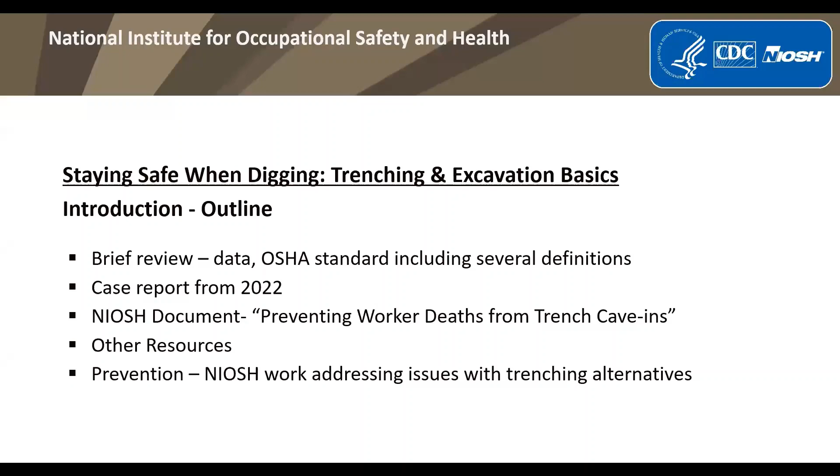Here's the basic outline I'll be following today. I'll be reviewing several different types of information related to trenching safety, emphasizing cave-in or collapse hazards, but I won't be presenting all the protective measures related to other trench safety and health issues, which might include falling loads, hazardous atmospheres, and hazards from mobile equipment. I think we might touch on some of those topics in some of our other presentations. I have placed a number of internet links in my slides that I hope will be useful to refer to, and I believe the slides, as Kevin mentioned, will be readily available for viewing later.

In a July 2022, so last year, OSHA news release, which was released in the midst of the increased numbers of fatalities in 2022, OSHA announced that in keeping with its national emphasis program for excavations, there would be enhanced enforcement initiatives and outreach programs focused on trenching. So far in 2023, as of early August, there have been 8 workers who have died in trench collapses, with those deaths recorded in the OSHA information system.

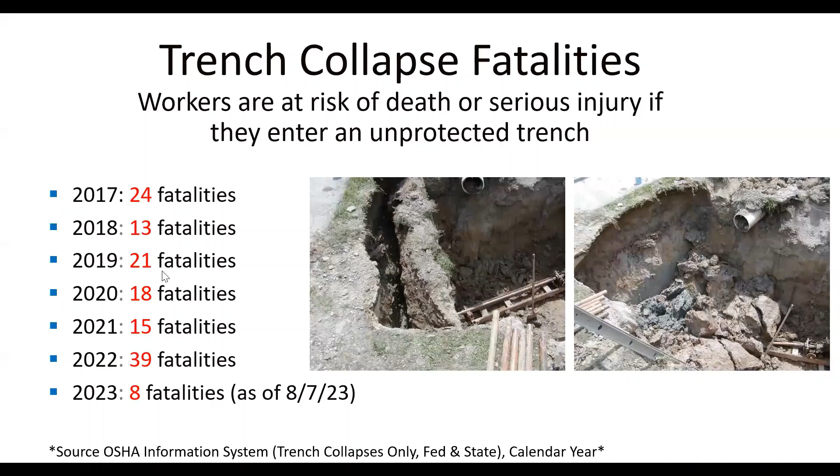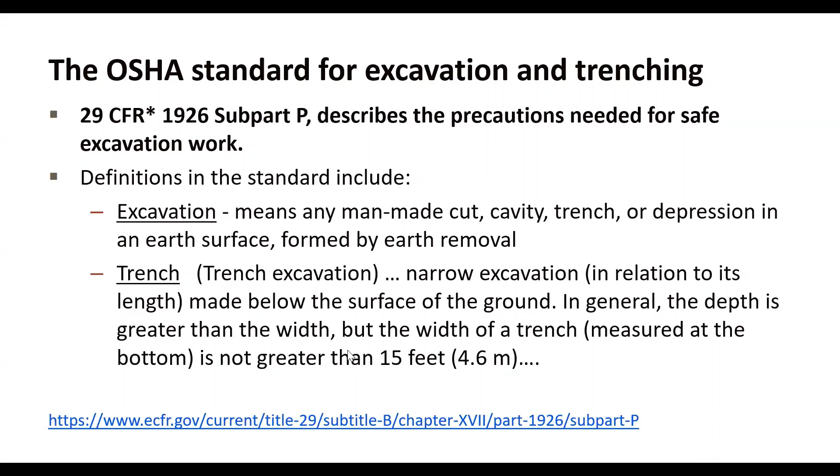The OSHA Trenching and Excavation webpage also has a link to the standard, but also has information on directives, videos, and links to useful publications.

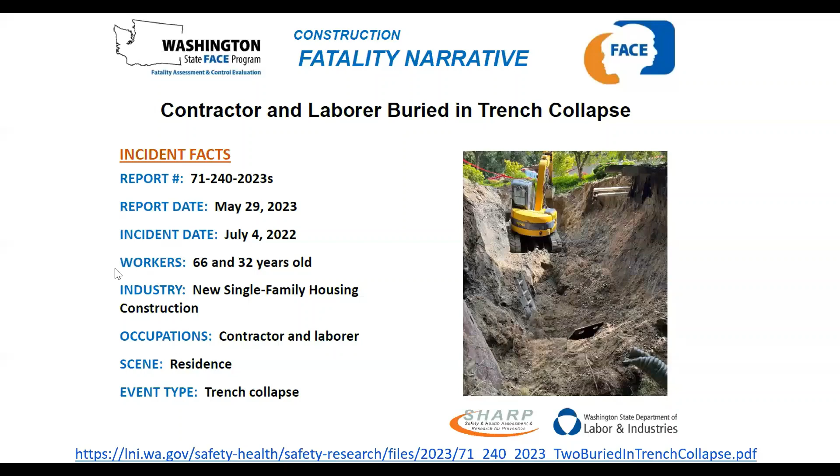Next, I'm going to go over a report of 2 workers who died in a trench collapse last year. This is information from the Washington State FACE, or Fatality Assessment and Control Evaluation Program. This incident involved new single-family housing construction.

In this incident, a 66-year-old contractor and a 32-year-old laborer died when the trench they were working in collapsed, burying them. A total of 4 workers had been working at a residence for a week to replace a sewer line, and they had dug a trench that was 26 feet long and 24 feet deep. It was 24 feet wide at the top and 8 feet wide at the bottom.

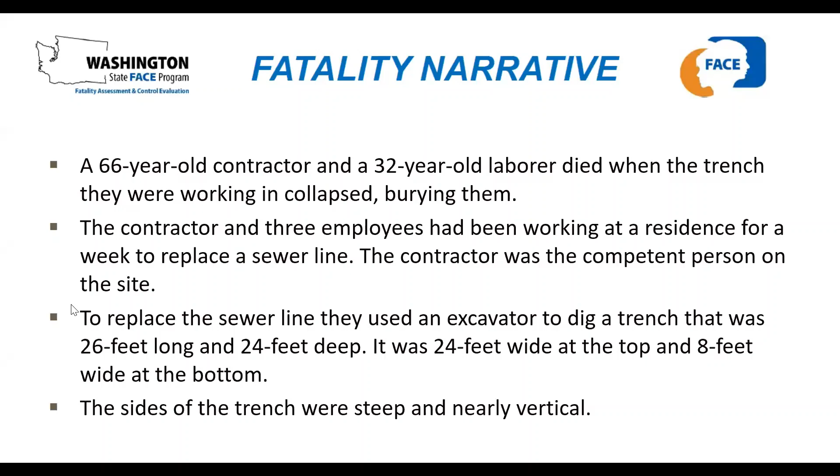The trench was dug in unstable type C soil, and protective systems or methods such as shoring, shielding, for example with trench boxes, or sloping and benching of the sides were not used. The day before the incident, a portion of the trench had collapsed after a rainstorm.

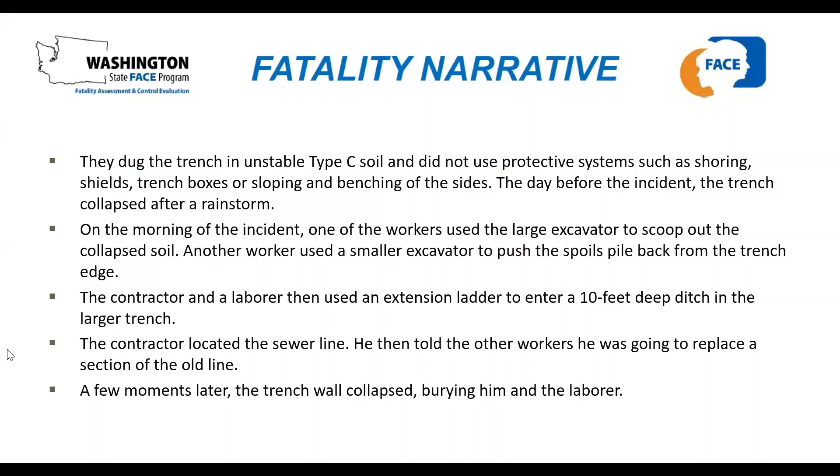On the morning of the incident, one of the workers used a large excavator to scoop out the collapsed soil, and the contractor and a laborer used an extension ladder to enter a 10-foot deep ditch that had been dug in the larger trench. A few moments later, the trench wall collapsed, burying both workers.

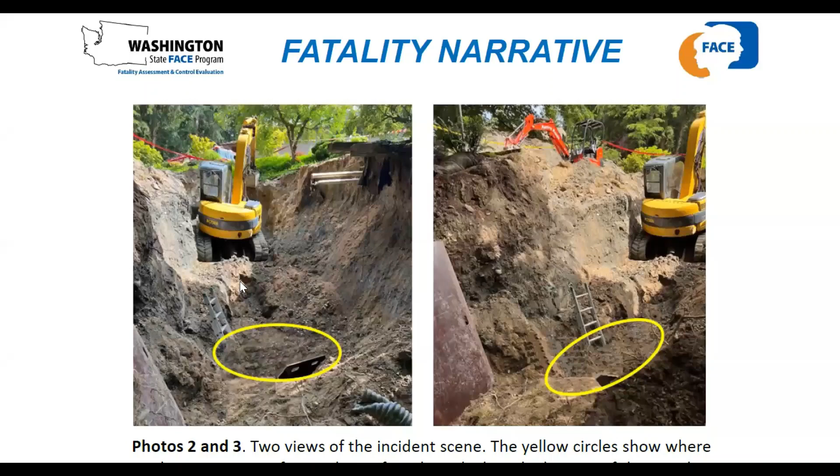This is a slide that has a couple of photos, which are a little bit hard to see, but the yellow circles show where the workers had entered the lower portion of the trench and where it had collapsed. Based on the findings, the report lists a number of requirements based on the Washington State Standard for Protection of Employees in Excavations.

The FACE program investigators also made recommendations in the report, including that all trenches should be inspected before workers enter, and that workers never enter a trench or excavation that does not have an adequate protective system in place. And workers should not assume there will be a warning sign before a cave-in, or that there will be time to escape should a collapse occur.

The National Institute for Occupational Safety and Health, or NIOSH, which is where I work, has a document called Workplace Solutions: Preventing Worker Deaths from Trench Cave-ins. The NIOSH document can be found at this link I have at the bottom of the slide.

And as I mentioned before, our document mentions that the OSHA standard describes the precautions required by OSHA for excavation work. The NIOSH recommendations presented for employers in this document emphasize that employers should conduct pre-job planning before the job begins, and I'm going to summarize some of those steps after this slide. And also the NIOSH document has recommendations for employers to use safe operations during the job.

The next 2 slides include recommendations for employers to perform pre-job planning. Employers should train and designate a competent person to ensure safety measures are in place, with a competent person being one who understands OSHA regulations, can recognize hazards, and is authorized to correct them. Employers should use processes to determine the exact location and depth of utilities before digging. 811 is the national call before you dig phone number that can be useful for this procedure.

Employers should have a competent person evaluate the soil to determine its stability. There are resources to help with this, including an appendix to the OSHA standard, which provides techniques for evaluating the condition of the soil. And employers should plan the job layout to identify safe locations away from the trench for spoil piles and heavy equipment routes.

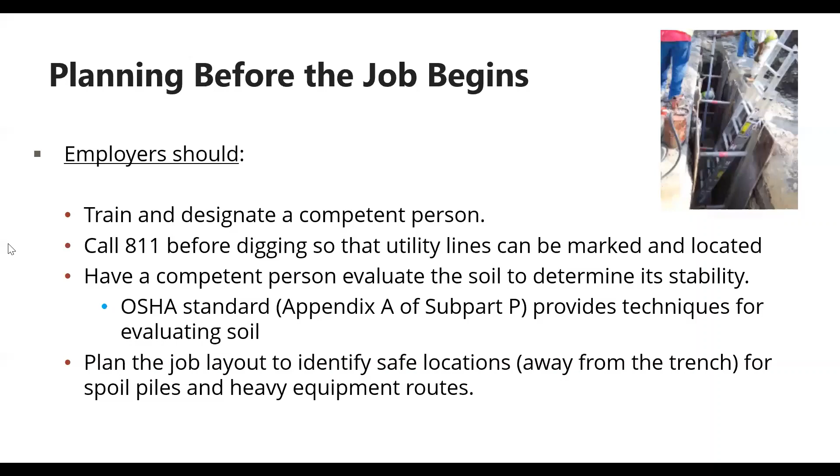Employers should also have a competent person determine what type of protective system will be used for the job and schedule the steps needed to have the system complete and in place before workers enter. OSHA requires that all excavations 5 feet deep or greater make use of protective system options, which can include sloping or benching the ground, shoring the trench with supports, or shielding the trench, for example, using a trench box. And I think we're going to see some examples of those later in this webinar.

OSHA also requires employers to provide ladders, steps, ramps, or other safe means of egress for workers working in trench excavations 4 feet deep or deeper. The NIOSH document notes that trenches greater than 20 feet deep can be more complex and require that the competent person adhere to the OSHA standard with options that can include choosing a manufactured protective system with the appropriate depth rating, or use of a registered professional engineer to design a site-specific protective system.

Employers should train workers involved in these jobs about hazards and work practices, with the training in a language that they understand and at the appropriate literacy level. And lastly, on this slide, employers should develop a trench emergency action plan to describe steps to be taken and to provide contact information in case of an emergency.

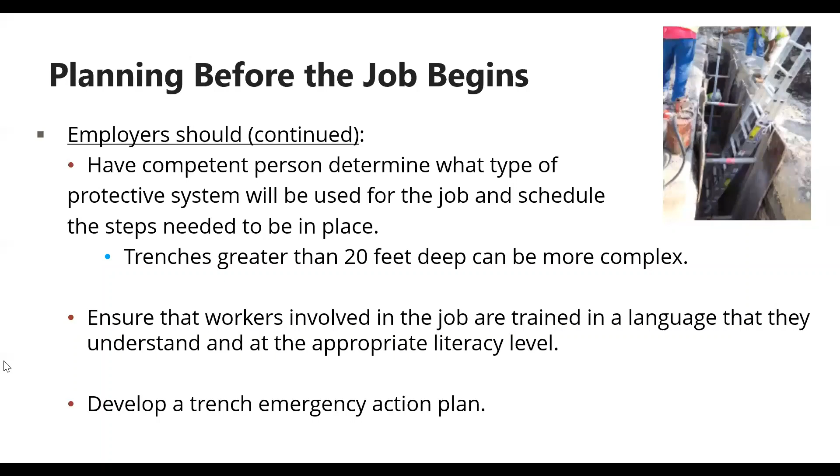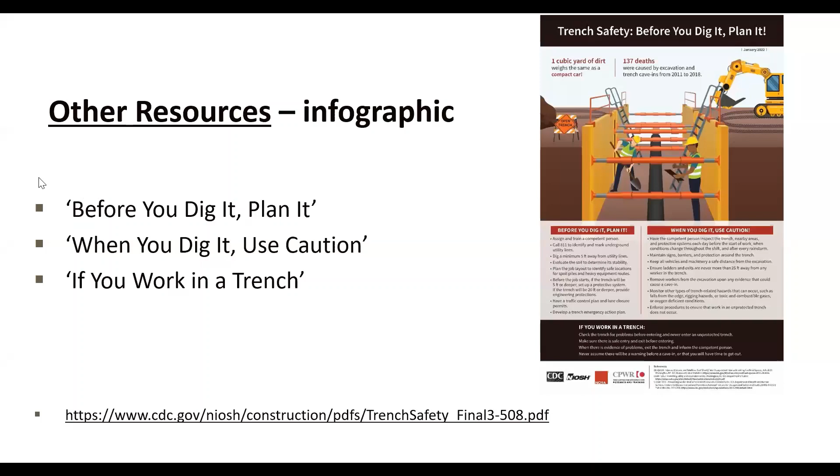There are lots of other resources on trench excavation safety, which are good for everyone to know about because different resources may be helpful for different purposes. For example, NIOSH and CPWR also have web pages on this topic, and I've listed the links on this slide. A one-page infographic is shown on this slide, and the infographic is organized around the categories of before you dig it, plan it, when you dig it, use caution, and at the bottom, there's a short section for workers titled, If You Work in a Trench.

There are short videos available, including one from just last month from the Laborers Health and Safety Fund of North America, and that video is called An Overview of Basic Trench Safety. NIOSH published a science blog in 2019, which reviewed trenching safety and construction. But the science blog also focused on current issues related to alternatives to trenching.

Consistent with the hierarchy of controls, one way to prevent trench collapse and in turn trenching fatalities is to use alternative methods where feasible. Among the alternatives to digging a trench are directional boring, pipe ramming, utility tunneling and pipe jacking, or relining the existing pipe, including the technique known as cured-in-place pipe. Cured-in-place pipe techniques may be used in some situations to perform needed maintenance or repair of underground pipes. This link at the bottom of the slide is the link for a different NIOSH science blog from a couple of years ago that explains some of the basics of cured-in-place pipe techniques.

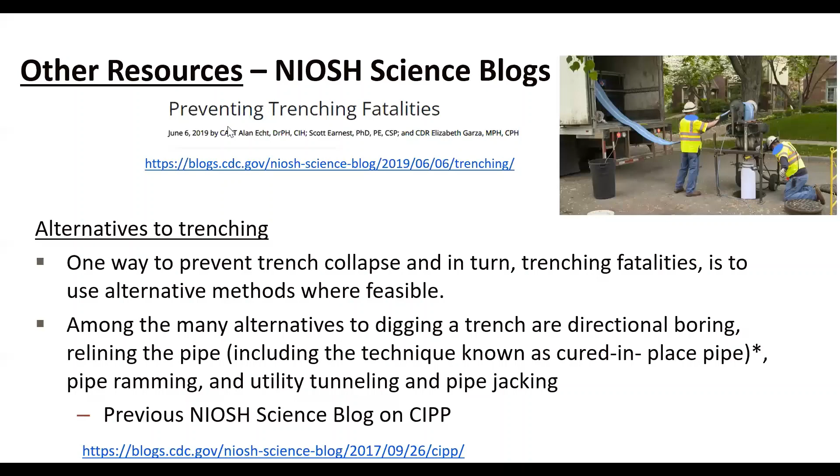And lastly, for my introduction to the rest of today's webinar, a trench safety stand down was first held in 2016, organized by the National Utility Contractors Association, with OSHA joining as a partner a year later. As you know, a safety stand down is an opportunity for employers to talk directly to employees and others about safety. June 2024, so next June, will be the 5th annual Trench Safety Month. And we encourage you to keep your eyes open for the mid-June 2024 dates for next year's Trench Safety Stand Down.

Okay. So good afternoon, everybody. My name is Phillippe Falkner. I'm a safety director for Ed Bell Construction here in Dallas, Texas. And just to give a touch of background so you can see the perspective on the comments I'm going to make, before my journey in safety management, I spent a long time as an operations manager. So I've seen both sides of this equation, not only building it, but making sure everybody's building it safely and everybody goes home at the end of the day.

So I try to make my presentations and my training a little less about process and procedure, and a lot more about culture and adoption. So the comments I have today are about what I have found to be some best practices that we use here in North Texas to really ensure that the processes and programs we set up, our people have the ability to be successful with them.

So one of the first things that I know Doug mentioned was also appropriate processes for soil classification. I think a good process is part of your planning, really determining soil classification, what type of system is necessary before you start digging, before you get the crew in there. You kind of put your people's back against the wall if they've already started putting a bucket in the ground, and then they're trying to figure this out, and they either don't have the right protection system, or they've got to move from benching to a protection system, or whatever it may be. Having this done well in advance is part of the critical planning process.

Making sure you've got support to your team to help determine the correct protective measures. You can have a competent person on site, but having additional resources, even for a competent person, sometimes two heads are better than one. If you've got multiple people trained for competent person training, make sure they're discussing with each other. It's always better to get kind of a group consensus than if one person's just unsure about what they've got on their hands. And that not only goes for soil classification, but what type of shoring is appropriate.

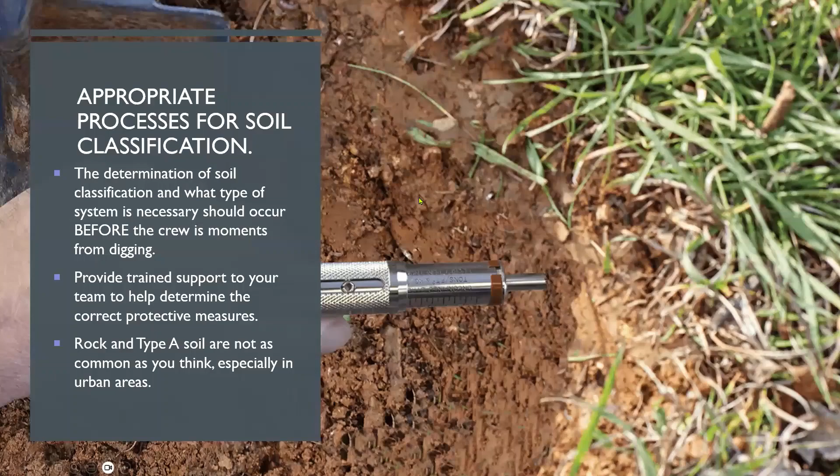So another thing I've seen as I've gone along here is when something does happen, and this isn't always true, but in my experience, everybody gets in at the start of the day, or the start of the trench, or the start of the placement of the protection system, and they really start evaluating it. Then everybody focuses, your competent person focuses, your foreman and your employees focus. But some excavations are set up permanently for many days or weeks to do something, but a lot of these are trenches for pipelines, and they move during the day. Some crews can get 200 or 300 foot of pipe in the ground today. So they're moving protection systems as they go. They're moving through what could be changing soil conditions, changing construction sites where equipment routes and stockpiles and all these things are kind of fluid and kind of in motion.

I think too often we get to the point where when we get started, you have an inspection happen, everybody checks on things. And then I think everybody gets a false sense of security of, well, we checked it, the guys know what they're doing, everything seems to be by the book for today, we're good. And then you look up and they've moved 50, 100 feet down the road, and maybe it's the exact same conditions. Maybe the entire world has changed for these people. You can't just plug and play. You can't set and forget it. And you need to be training your people that the evaluation and inspection process is live and it's constant, and it needs to be something in their minds. There's never a spot where they get to check that box and go, okay, I'm done with that step for the day. They need to be continuously monitoring that.

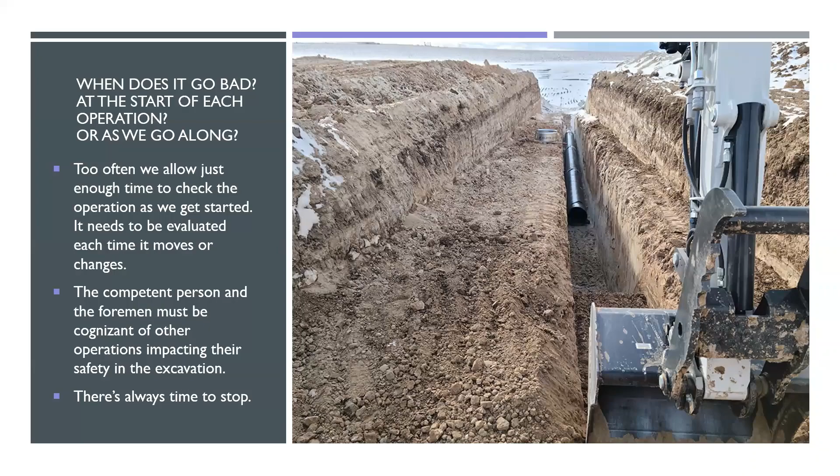I get asked a lot, who are you training? What are you really doing here for your people? I know a lot of contractors focus on getting a handful of people trained enough that they can serve as competent persons to check a box. I really just don't think that's a good way to go about it because, even if you're in a small job, that competent person's there all the time, focused all the time, but sometimes in the excavation, he still can't get every angle of it at one point.

And you got to keep that training going. You can't be like, well, I checked the training box this year for trench protection, we can move on to fall protection or caught in between or something. If you've got folks that work in open excavations, that needs to be a regular recurring training multiple times a year. And you've got to communicate your expectations of what you want done and what they need to do safely to get the work done, and make sure you're providing them the resources they need to do it.

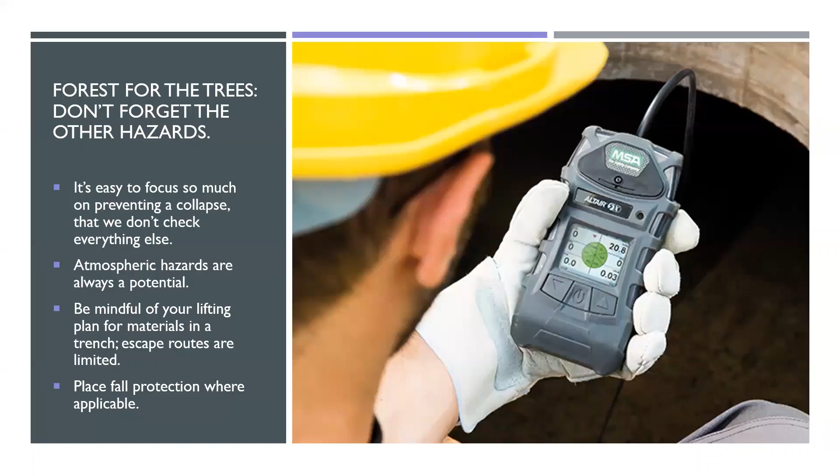The big thing I preach to my team here and other folks here in Texas is making sure that, overconfidence is one thing, but there's a close enough mentality. Crews get out there and they may have had a plan. They've got a certain protection system or a benching plan in place. They've got what type of equipment they think they needed. And then they get going.

And of course, the competent person or somebody may decide, well, this isn't quite up to par of what we need. And then they have a, yeah, but it's close enough, because if not, we're going to have to stop and wait on getting new things out here or put a plug in it. We all got to keep in mind that there's almost no excavation we do where you're not at some sort of chance for injury or death.

A lot of times after an incident happens the employee tells me, I feel like I just didn't have time to make it right because we were behind, because I was going to have to wait on a different protection system. You got to make sure your guys don't feel like they're caught, they're trapped, they're forced, they're up against the wall. You need to make sure to express in your training and your daily planning and your operational planning that these guys understand if it's not right, it's absolutely okay to take a knee until it is. And make sure you're preaching to them that production takes that back seat to getting a safe excavation.

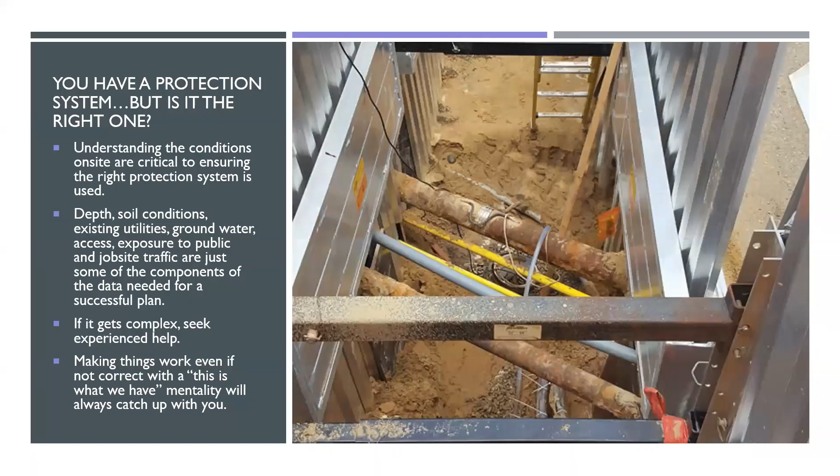So, Jessica, that's what I've got here. If there's any questions, we can take them at the end, but that's what I've got for now. So I will pass it on to, let's see, where did he go? Perry. So thank you.

Well, hi guys. My name is Perry Sylvie. I'm with BTConstruction and B Trenchless, and I'm also the chairman of the Trenching and Excavation Safety Task Force. So I'm going to change gears with our presentation today and share a little bit about what we've been doing with this task force, and really just an introduction to what this is all about. We've been together as a group here for a few years, hoping to make an impact across the country, and hopefully some folks here can take away some things from this presentation and learn a little bit about what we're doing and how you guys can get involved.

So, Trenching and Excavation Safety Task Force, aka TEST. What we're going to learn today is a little bit of an introduction. We're going to answer some of the basic questions about the group and what we've been doing over, like I say, the last few years. So we'll answer the what, why, who, when, and where on the group.

And hopefully there could be some takeaways here, and maybe we can have some more folks join our volunteer effort. We're not getting paid for any of this. This is not at all a money grab. All this is an awareness campaign. We're doing our best to raise awareness and hopefully prevent trench collapse fatalities in the construction industry and try to make an impact for the industry as a whole.

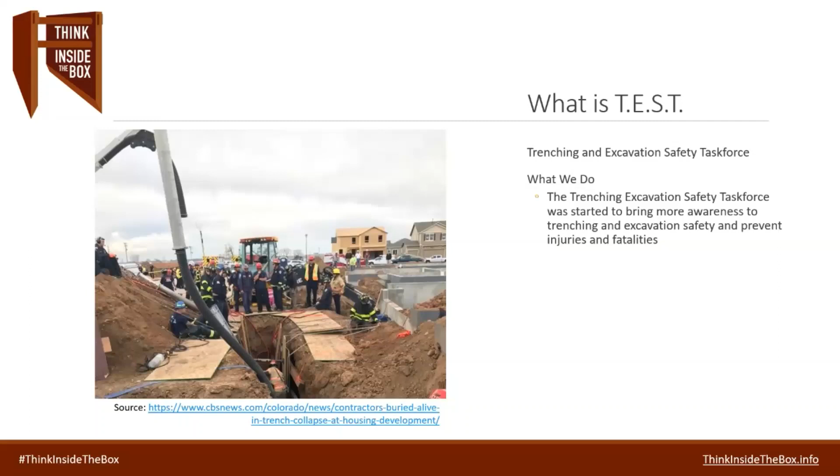So what is TEST? Again, we're the Trenching and Excavation Safety Task Force, and we started this to bring more awareness to trenching and excavation safety and help prevent injuries and fatalities. When we started meeting as a group, we created a mission to keep us focused as a task force and make sure we're all moving in the same direction. Our mission is to create industry awareness and drive insight into trenching and excavation safety, collaborating without organizational or geographic boundaries in an effort to improve day-to-day safety for field workers.

And right away, we came up with the Think Inside the Box message. The hashtag Think Inside the Box is something we're utilizing on social media platforms. If anybody were to search for that hashtag, you should find any of our posts that we've been putting out there, and again, get a consistent message across the board.

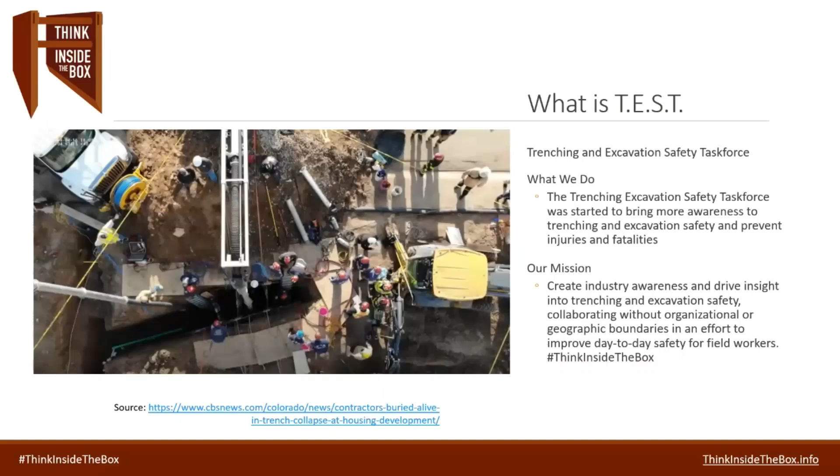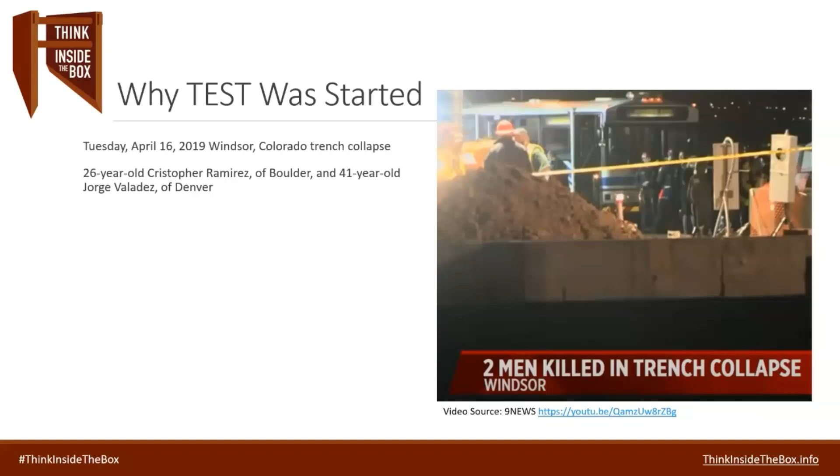The pictures that you're seeing here are the reason why we started this task force. This event occurred in northern Colorado on April 16th, 2019 in Windsor, Colorado. This trench collapse killed 2 people: 26-year-old Cristopher Ramirez of Boulder, Colorado, and 41-year-old Jorge Valadez of Denver. 2 people that did not need to lose their lives, and it was very impactful for us in Colorado, and this is what prompted this effort.

The story goes, they were digging for a sewer service. This PVC pipe that they were installing was installed roughly 15 feet deep. During the quote unquote rescue operation, they were able to get a PVC pipe down to one of the workers, and they were able to communicate with him. These firefighters could actually talk to him for several hours after the collapse. Then they called his wife, and he was able to talk to her before he passed away. And shortly after, she had their baby boy.

So a really impactful story, one that drives us even to this day, and one that we hope we can never repeat again. We don't want to see any of these types of events ever occur. The unfortunate thing on this particular incident was that there was a trench box on site, and they chose not to use it. So of course, our question is always, why? Why did they choose not to use a protective system when it's readily available?

So we continue to ask that question, and we continue to try to find solutions and try to find creative ways to help folks make the right decision. One week after this event occurred, we actually had a meeting with our AGC Safety Council, the local Colorado chapter, and that's when we started this task force. There were about 60 safety professionals in the room, and I stood up in that room and I said, guys, we got to do something. I don't know what, but we need to do something. We need to figure out how we can stop these kinds of events from occurring.

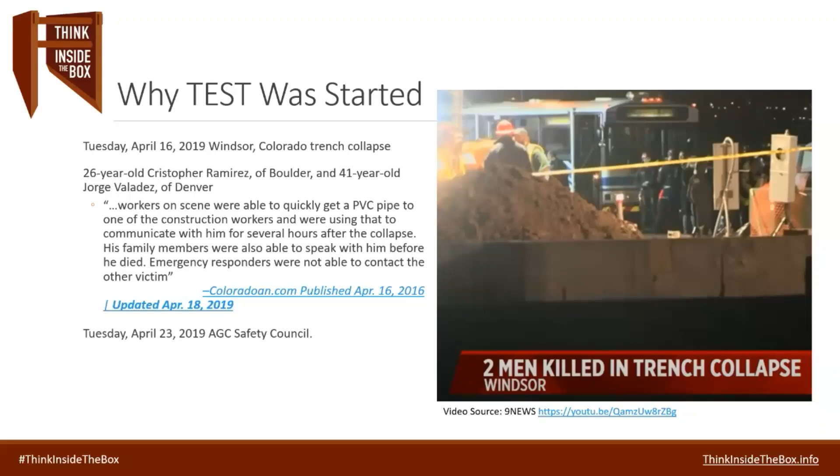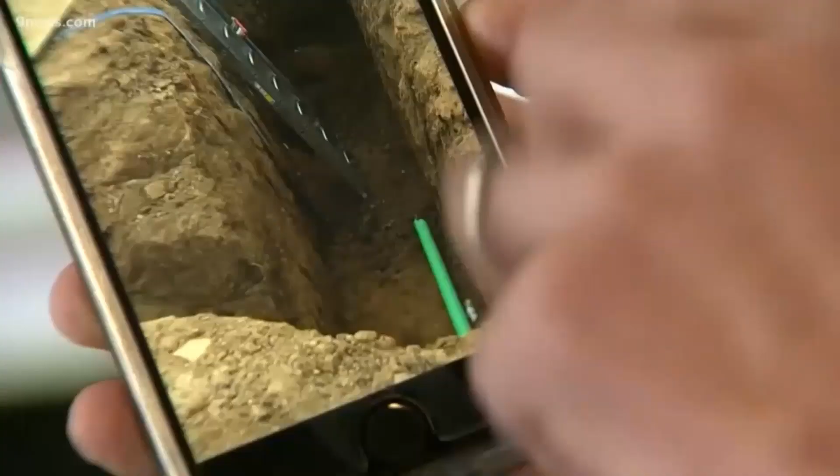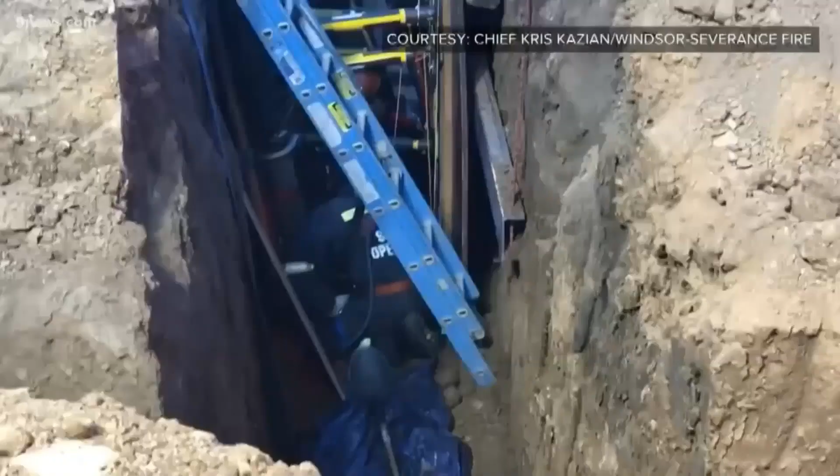This is a once in a career type incident. The call that cleared the garage on Tuesday sent everyone, including Chief Kris Kazian, to a home construction site on Camberley Drive. All that dirt is all dirt that caved in. Two workers in a trench were buried in about 8 tons of dirt. So very heavy, very compacted when it all collapsed. Fire crews don't think anything was used to shore up the trench walls. On arrival, we did not see a trench box in place. They used heavy equipment and eventually shovels to dig. Every time we got a bucket or two of dirt out, more dirt would fall in on them. They knew at least one worker was still alive.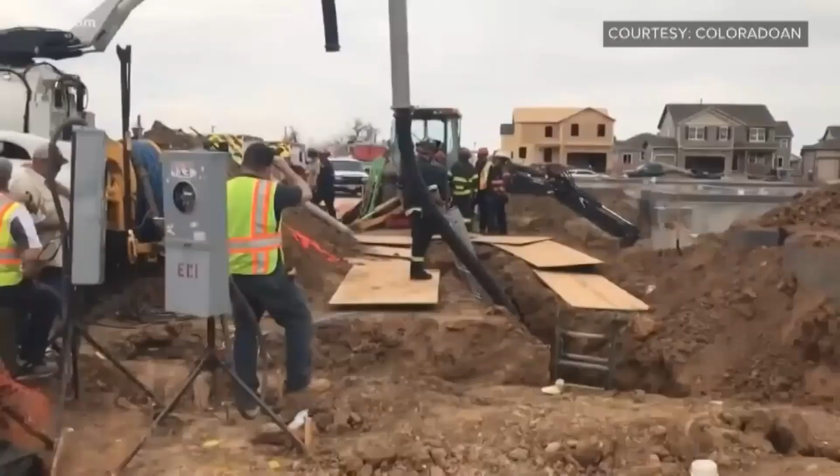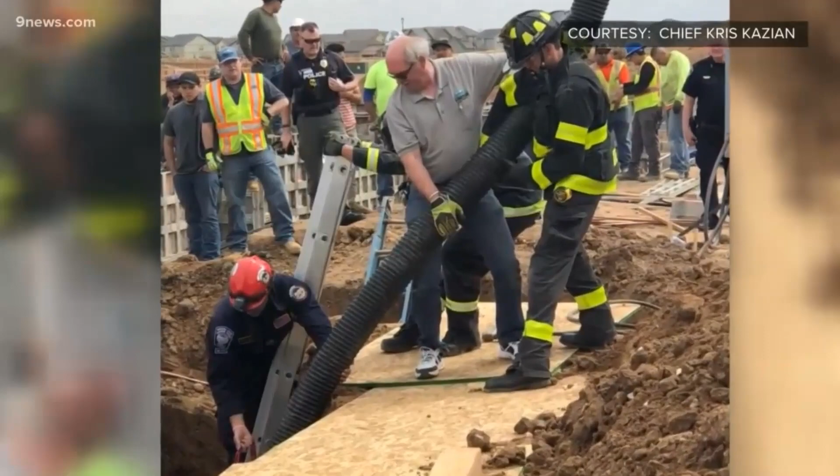For whatever reason, in this case, he was able to breathe for hours. Able to talk, too, first through PVC pipe and then through a microphone to family gathered at the scene. Our crews felt that it was important for this family and for him to have an opportunity to speak. A chance to say goodbye. As responders, we were concerned that we might have a poor outcome, but we wanted to make sure that he and they got a chance to communicate. It'd be nearly 12 hours before crews pulled the men's bodies from the dirt. So it's very challenging for all of the responders, mentally and physically. The kind of call no chief wants to repeat. Our thoughts are with the families. It's definitely a tough time, and certainly not the outcome that we were looking for, and we worked very hard to have a different outcome. In Windsor, Noel Brennan, 9 News. Last year, OSHA announced it was making it a priority to reduce trenching and excavation accidents. This comes after 23 workers were killed nationally in 2016, another 32 in 2017 and 2018.

So again, the message we came up with is think inside the box. This message is catchy, right? It's something that we think can be universal. It's something that we see as a message that anybody and everybody will understand. It's something that you can see that box, that picture of a trench box. And we're able to identify that quickly to know that that box is a protective measure. And all of us in the industry know that this box does what it's supposed to do if you actually use it.

So that catchy phrase is something not just about the trench box and the protective system, but also it's a measure of protection that is established. It is a measure that has been working for a long time. So thinking inside the box is important. We don't need to think outside the box. We don't need to think of a new method because the old tried and true methods work. If we think inside the box, it will work.